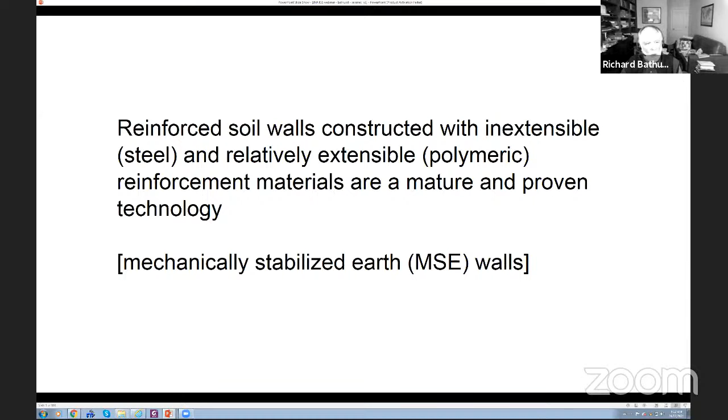The utility of these types of structures, that is to reinforce the soil, was increased with the advent of high performance polymeric materials such as geotextiles and geogrids.

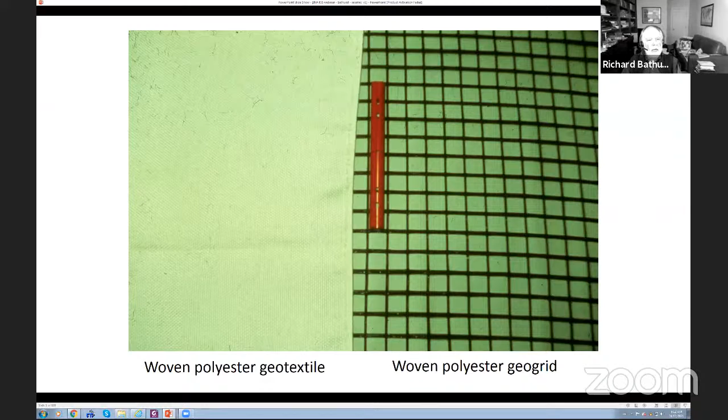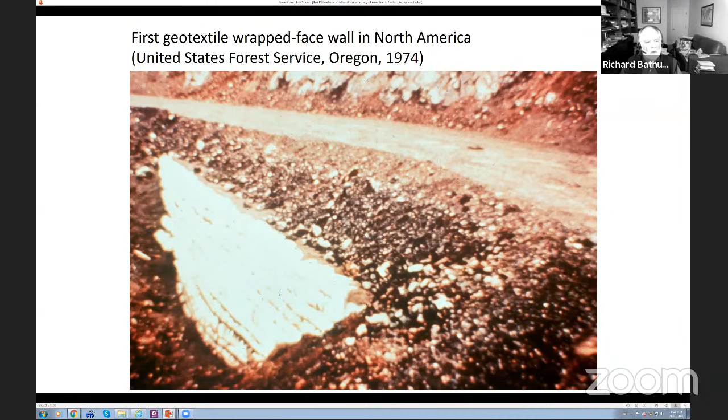Here is a slide of the very first geosynthetic reinforced wall constructed in North America. It's actually a wrapped face wall type. The slide is pretty grainy and arguably not a very attractive structure, but it is historical. This structure and many like it were constructed by placing horizontal layers of reinforcement in the ground and then wrapping them around and tucking them back in to generate a flexible wrapped face structure.

Some of these systems were very substantial. In 1989, a wrap face wall was used to support a prefill at a construction site in Washington State, United States. This wall was almost 13 meters in height at that time, and it was the largest wall in the world at that time. It was a temporary structure.

These types of wrap face walls are not as desirable as permanent structures because of the exposure of the wrap faces.

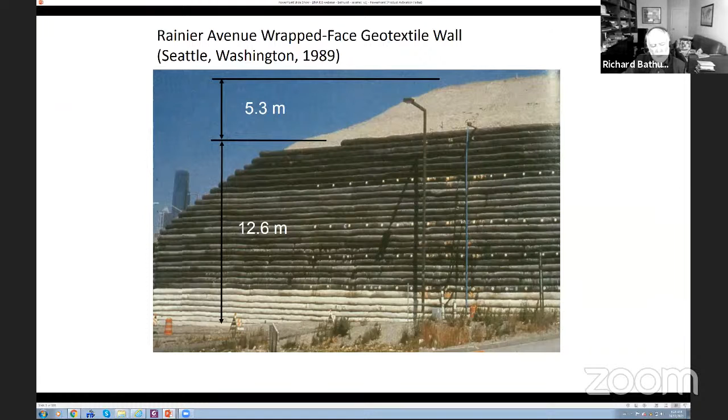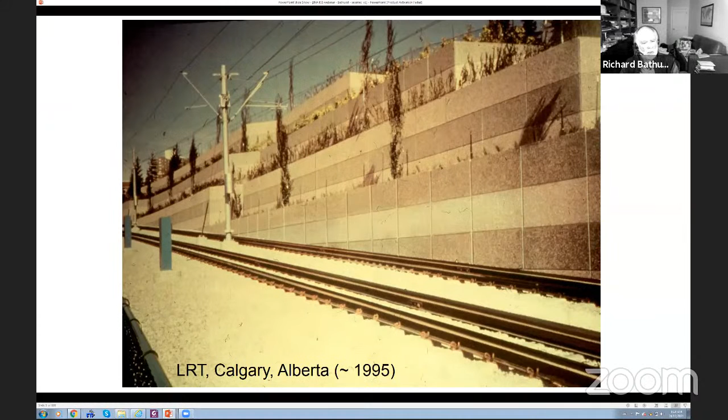Now we have seen hard-faced walls, and here, when you look at this structure, it appears to the layman to be a conventional gravity concrete wall in a tiered form. But the magic is that the facing units and the soil behind the facing is reinforced with horizontal layers, in this case of geogrids. These are attached to the panels, and the geogrid reinforcement is extended into the soil behind the facings.

This slide shows the construction of this type of system, and it happens to be the first propped panel wall constructed in Canada in the early 90s. Here you can see the geosynthetic reinforcement attached to the panels, extended and pre-tensioned into the backfill, and then the fill placed on top of it. This construction continues from bottom to top.

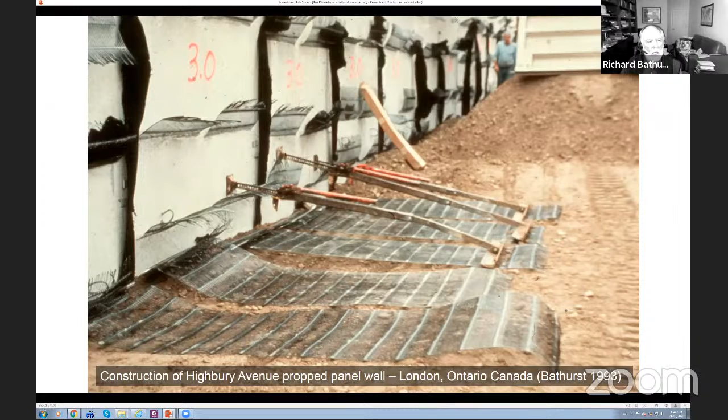Another type of system which is quite popular is the use of modular block facing units, which are most often dry cast mortarless concrete blocks. These are stacked, dry stacked to form a facing.

Then the facing is anchored with geosynthetic reinforcement, as you see here. What we have created, in effect, is a gravity wall, which is a composite of these concrete blocks, the reinforcement, and this reinforced zone of soil. Just like a conventional retaining wall, its purpose is to retain the soil located behind the structure.

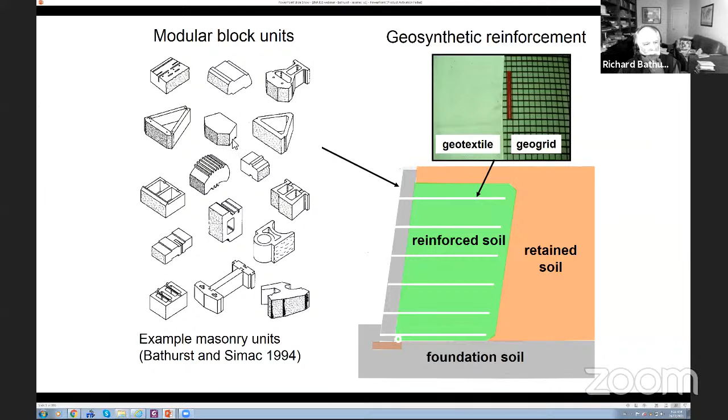There are many types of these modular block systems around. They have different shapes. Some of them are solid, some of them are hollow. They have different connection devices in order to ensure a good connection between the facing and the reinforcement.

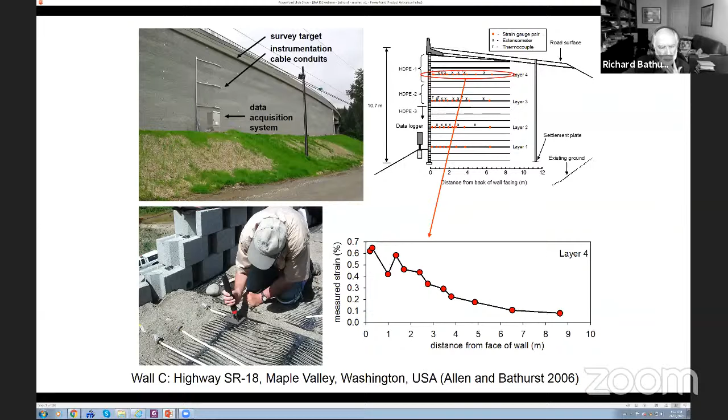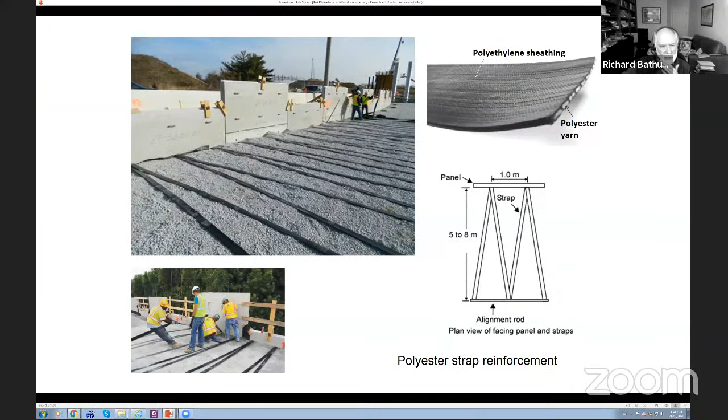So cost is very important, and it's fair to say that this technology has been driven by the manufacturers of these reinforcement products. And people like me have spent careers trying to understand how they work.

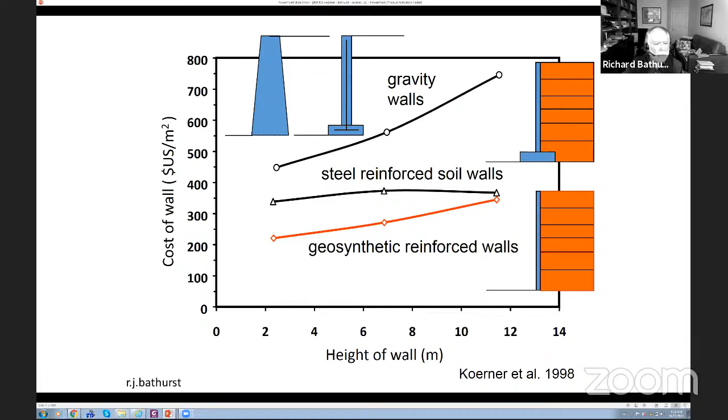Nowadays, sustainability is becoming much more important. What do we mean by sustainability? It's the combined benefit due to minimal environmental impact, cost, as we saw before, but also the functionality and aesthetics of the structure that you're constructing.

A few years ago, with my colleagues in Spain, we did a sustainability analysis of different types of structures: gravity structures, cantilever structures, and MSE walls constructed with steel and polymeric reinforcement. This type of audit ranks different systems using a scoring that includes environmental, economic, and societal function aspects. The higher the number, the more sustainable the structure.

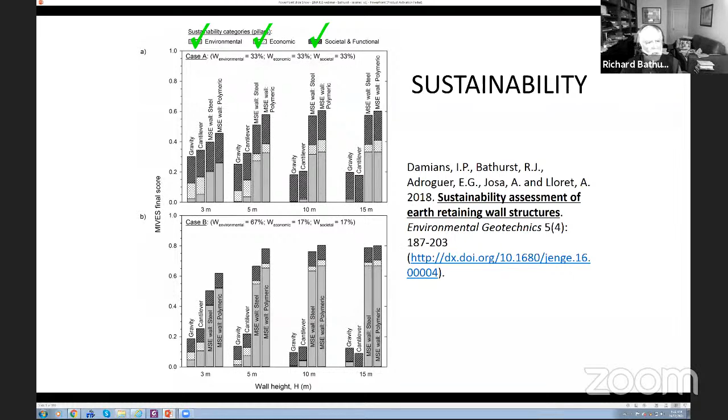But we're here to talk about seismic design and performance of geosynthetic reinforced soil walls during earthquakes. I'd like to start by saying that geosynthetic reinforced soil walls have demonstrated good performance during earthquakes, despite some slides I'm going to show where failures have occurred. But in general, they have performed well.

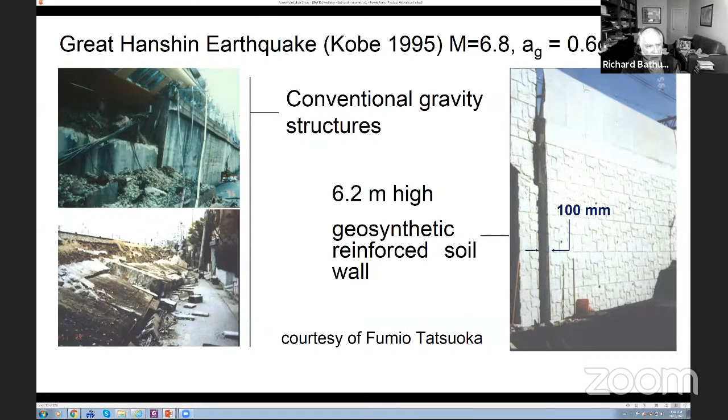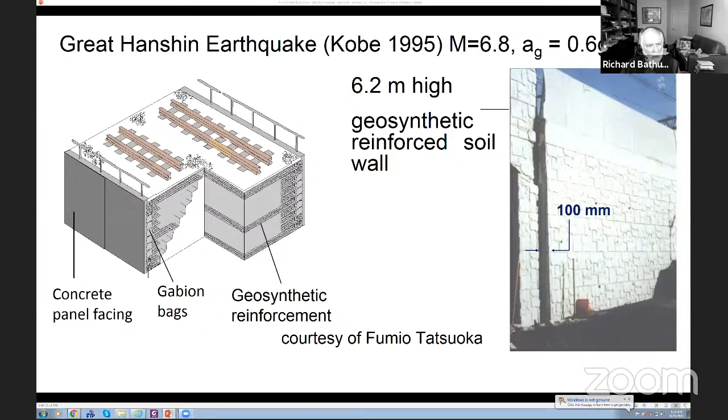Some of the performance features and characteristics of this earthquake were that in some places the accelerations were in excess of 0.6 G, and in a lot of places they were down around 0.2 to 0.5 G. There was very little damage to many of these structures, including panel and block-faced walls, even for those that were more than 12 meters in height.

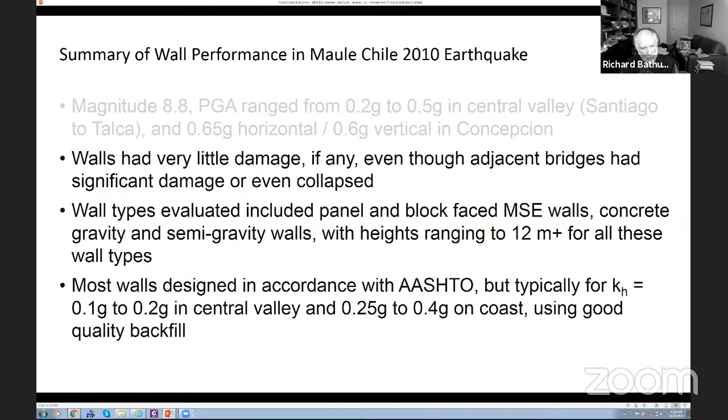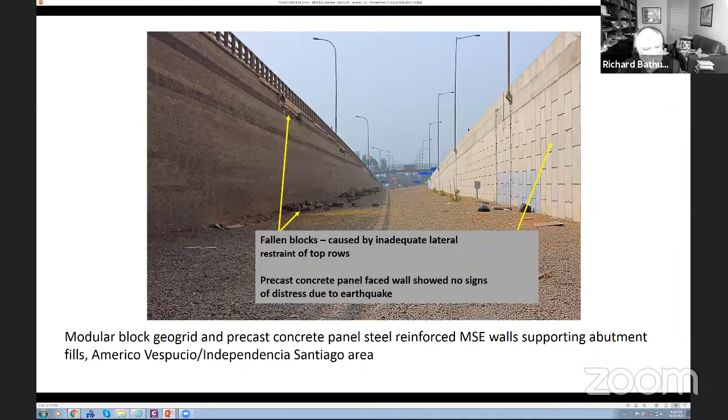Now, other techniques have been used for these types of structures, and I wanted to mention some innovations in Japan. Japan, of course, has a history of having to be subjected to large earthquakes. One technique they've developed to improve the seismic performance of the backfill used in the reinforced soil zone is to use cement-treated gravel, where they add about 6 or 7% cement to tie the material together.

An important question that arises when we are designing these MSE wall systems is: when do we need to carry out seismic analysis? Do we have to carry out seismic analysis for all peak ground acceleration cases? To answer that question, it's useful to look at some experimental shaking table tests carried out by others, including that shown here by Atik and Sitar at the University of California, Berkeley.

What you're looking at here is a schematic of a shaking table, the hatched line you see here. In a shaking table test, you put a model on this table, then shake it to simulate an earthquake event. In this case, they constructed two model cantilever wall systems. They look like excavations, but these are pairs of cantilever walls, placed in a volume of sandy soil.

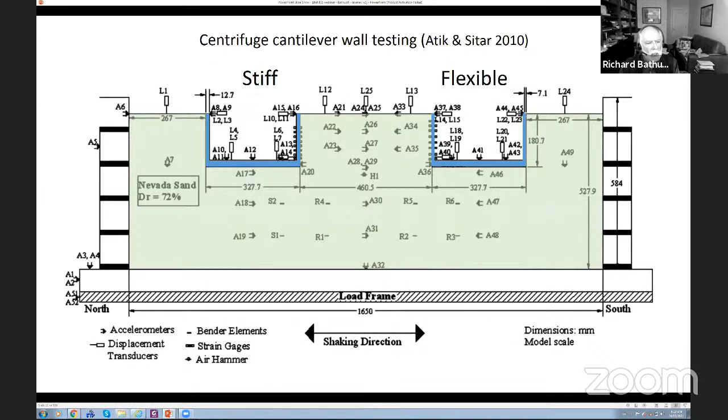The system on the left are cantilever walls that are quite stiff, and on the other side are cantilever walls constructed as models to be more flexible. They progressively shook this table back and forth, increasing the magnitude of the horizontal acceleration monotonically, uniformly. Here are some results.

On the left-hand side, we're looking at the stiff wall case. As the peak ground acceleration was increased progressively, they measured the magnitude of the additional dynamic force the wall was sustaining. Basically, there was no additional dynamic load measured on this stiff-faced wall until we got close to about 0.4 G, and then it increased more or less linearly with increasing horizontal acceleration.

So somewhere less than 0.4 G, the wall started to feel that additional dynamic load due to ground shaking. Its neighbor, with the flexible walls, this effect of the dynamic load occurred in excess of 0.4 G. So the dynamic load was not felt for the flexible wall until a larger peak ground acceleration occurred. There seems to be a difference in response based on how flexible or how stiff these retaining wall structures are.

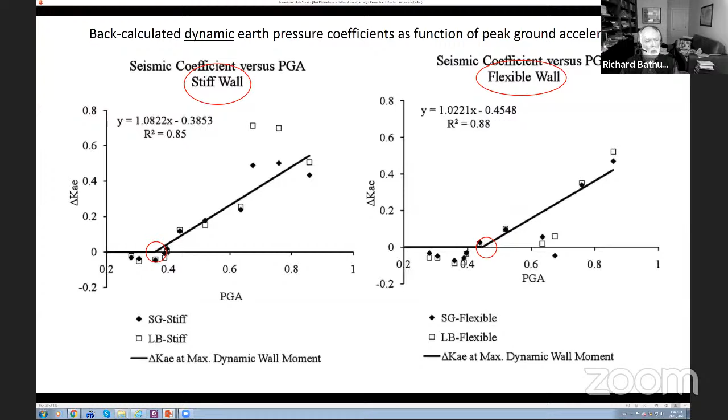This difference between stiff structures and flexible wall structures has been detected in other shaking table tests, including the ones shown here. A series of small scale tests were performed on a shaking table, and the difference between the tests was that some walls were gravity type or cantilever type, so relatively rigid, and another set of tests were done using geosynthetic reinforcement. Again, the peak ground acceleration was increased steadily over the course of the experiment, and the amount of deformation or wall displacement at the top of the wall was recorded, shown here on the vertical axis.

The gravity type and cantilever type walls had this type of response, with deformations increasing with horizontal acceleration. The reinforced soil walls had the same qualitative performance, but the curves were shifted to the right. Both show that the reinforced soil walls are more ductile, and the difference between these more flexible walls and conventional structures occurs somewhere around 0.5 G. This is not inconsistent with what we saw in those other shaking table tests done in California.

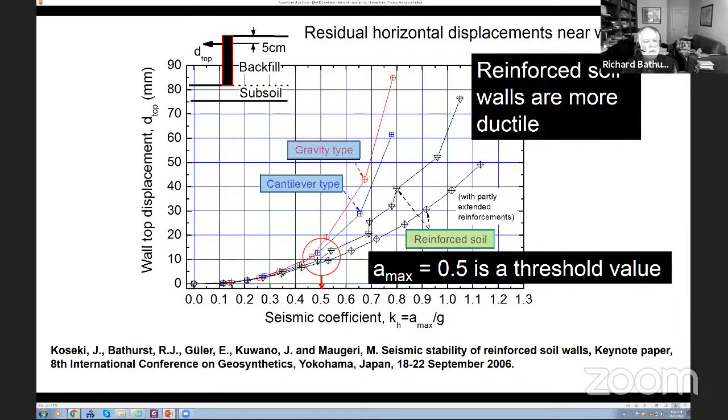How have actual walls performed? This is a wall that was constructed in California. It survived the Northridge earthquake in 1994. The peak ground accelerations at this site were estimated to be about 0.5 G. But when we looked at the face of this structure, there was no evidence of distress.

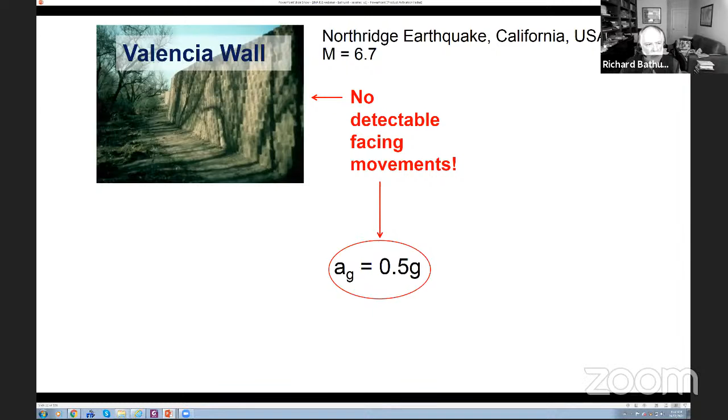However, when we went and looked behind the wall, there was a disturbing crack that had formed behind the retaining wall face. On closer inspection, and looking at the history of construction, what we found was that the contractor had originally designed the wall properly, extending the reinforcement layers to the full length, about 5.5 meters initially. But then he decided to place some subsurface utilities in this region, which required him to cut the reinforcement. This was not appropriate.

But the point is that despite attempts to modify this wall design, the wall still performed well. It was clear that there was additional conservatism in the design that allowed this wall to survive despite the worst intentions of the contractor.

In the United States, in the most recent AASHTO design guidelines, they recognized that there is inherent conservatism in the design of these reinforced soil systems when you design them for static. And this residual safety is enough for these walls to behave well if you then subject them to a peak horizontal ground acceleration less than about 0.4 G.

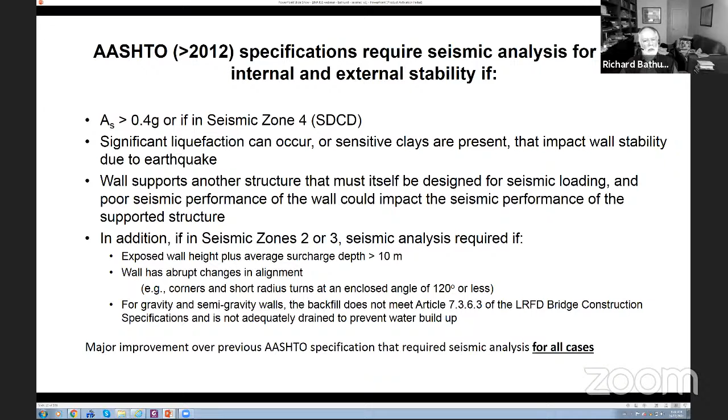When we design these walls, we start first by recognizing what are the limit states or modes of failure that these walls will have to survive. For those of you who have done this type of design work, you will recognize that we identify these limit states or modes of failure as falling into external stability categories, internal stability categories, and facing stability categories. And we design for these modes of failure for static.

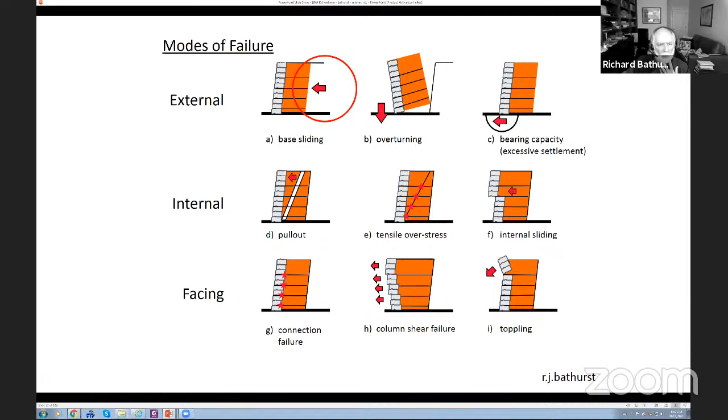What we have to do is consider the additional forces that are developed when seismic loads are imposed on these systems. So if we consider first external base sliding, the question is, what is the additional force that will be exerted on this composite mass as a result of horizontal ground accelerations or even vertical ground accelerations. The method that first comes to mind is the so-called Mononobe-Okabe theory approach.

The Mononobe-Okabe approach is simply the conventional or classical Coulomb earth force or earth pressure approach, in which additional horizontal inertial forces and potentially vertical forces due to seismic acceleration are included in the stability calculations for this critical wedge. And if one goes through the mathematics, you can relate the total active earth force - due to static plus seismic - in a classical active earth pressure formulation in which KAE replaces the active earth pressure coefficient that we recognize from classical active earth pressure theory.

So this is sort of the first level of analysis that we might carry out for these type of systems. And of course, the magnitude of this force is a function of the geometry of the wall and the back slope, and the friction angle, and the orientation of the face of the wall.

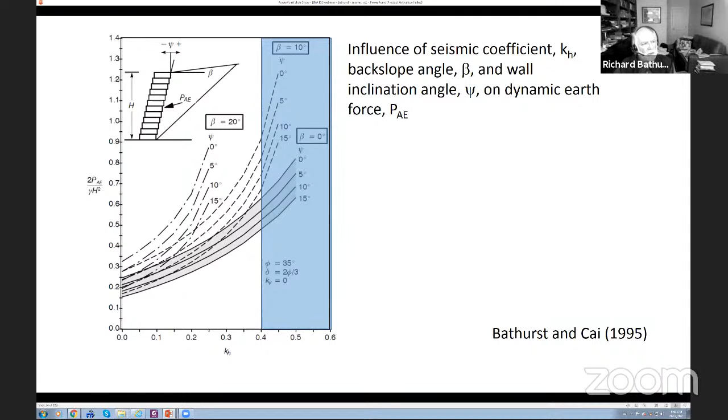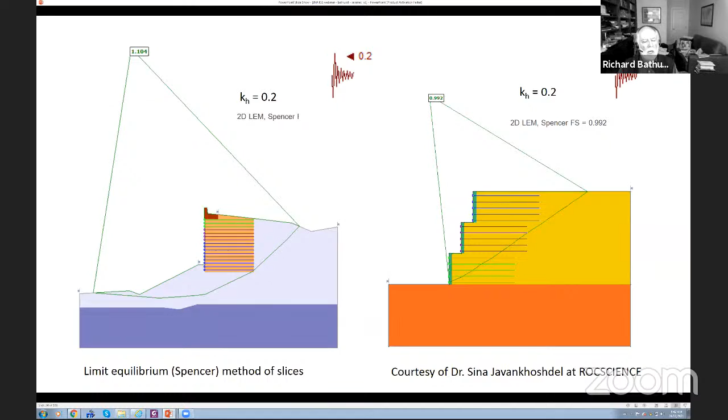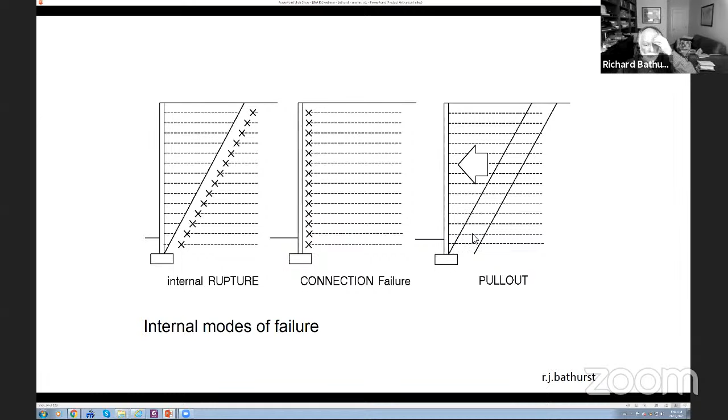We design to ensure this active earth force is less than the allowable tensile capacity of the reinforcement, so it doesn't rupture or strain excessively. This load also has to be less than the pullout capacity of the reinforcement in the pullout length within the resistance zone, and finally less than the load that can be carried by the connection. That's the classical simplified tieback wedge approach.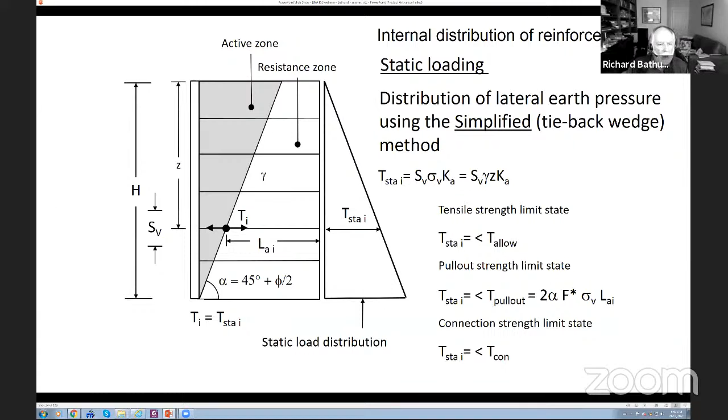Now, what has happened recently in the United States is that the distribution of load or pressure carried by each reinforcement layer is calculated using the stiffness method. As the name implies, this relates the load in the reinforcement to its stiffness, not its strength. This method shows that the distribution of load doesn't increase linearly with depth as in the previous slide; it's more bilinear.

The calculations are otherwise similar, although this method introduces empirical coefficients that account for the stiffness, as mentioned, as well as the flexibility of the facing and similar factors. Again, in design you ensure the maximum calculated load is less than the allowable strength of the reinforcement, pullout capacity, and connection performance, as before. This method provides more reasonable estimates of reinforcement load—the simplified method used in the US before last year was excessively conservative.

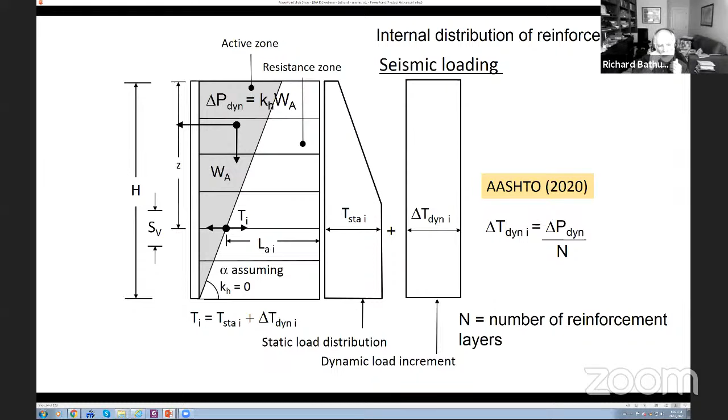That's the premise of this method for calculating the internal distribution of reinforcement loads in MSE walls or geosynthetic reinforced walls under seismic loading. How do these methods work? I just showed you one treatment of the additional horizontal load due to horizontal shaking. We've done shaking table tests and looked at different methods people use to calculate this additional dynamic load. Basically, we found this superposition technique does a reasonably good job, at least in our shaking table tests, matching the measured tensile loads in these reinforcement layers under simulated earthquake.

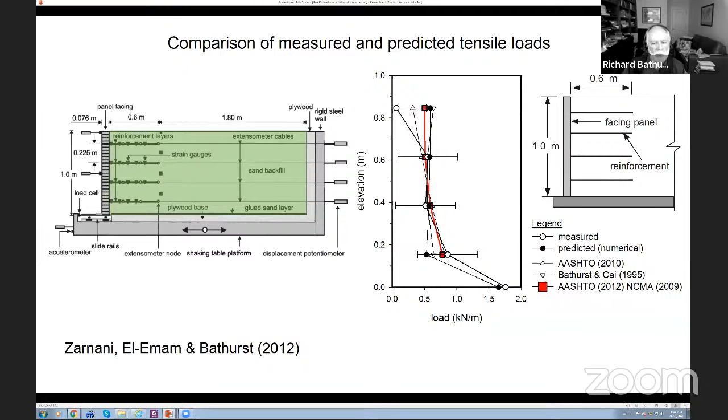Here's a slide showing some shaking table tests that we have performed in the past. Here you can see a modular block wall, and here's a picture of our shaking table at RMC at that time. And I'm going to show you a movie.

This was a fairly intense simulated earthquake. There's a lot of audio with this particular slide, which I don't want to share with you.

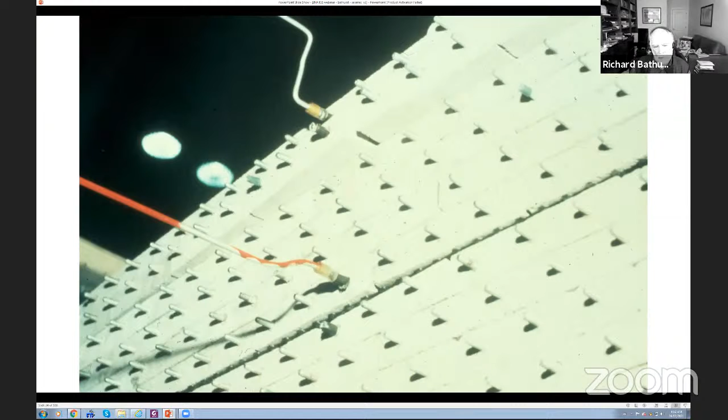So here you see, looking up the face of that same test after the test was over, and you can see some of the blocks have shifted. This speaks to the need to ensure, particularly at the top of these walls, that you have sufficient connection capacity. This is easily done either by constructing walls that have very good mechanical connections, or other techniques that people have used to tie the top of these walls together.

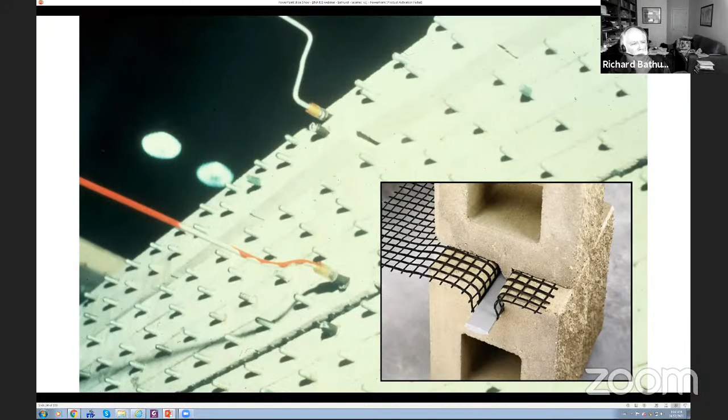I had the opportunity to do a reconnaissance of retaining wall performance after the El Salvador earthquake in 2001, and this was quite a significant earthquake. It did a lot of damage, and there were many conventional gravity wall structures like the one you see here that failed absolutely completely. This was a full-scale laboratory for me to go down and see how different types of retaining walls behaved during this event.

Here's a modular block wall that didn't fall down, but it had some cracks on this corner. Again, you may recall in AASHTO they say pay special attention to these outside corners.

But on the other hand, there were other walls. In fact, this one was just across the road, and this one had actually been better designed, and it behaved perfectly. It was because it had been designed for seismic loading, using seismic design recommendations that I was involved in at that time for the design and construction of modular block walls.

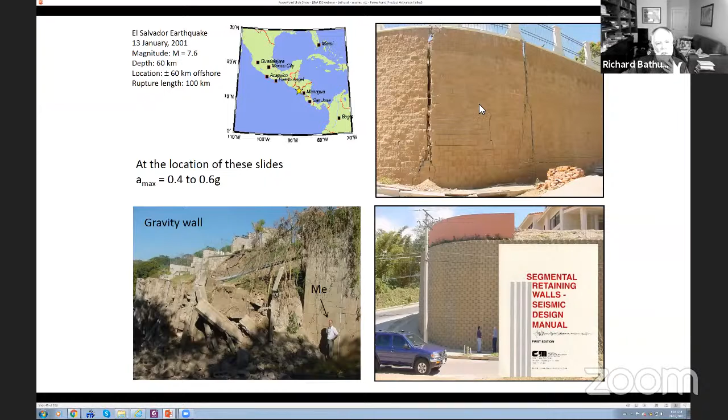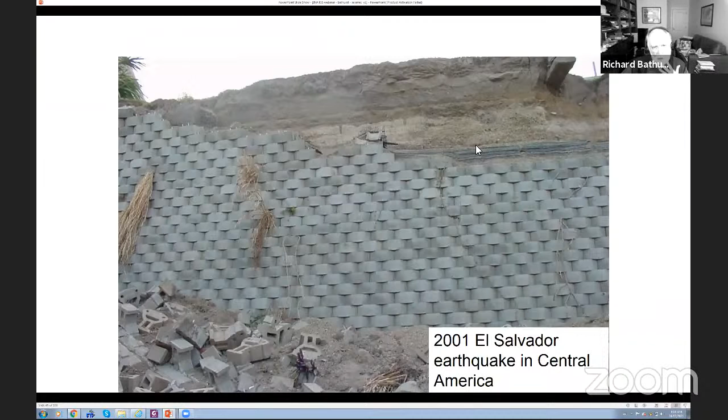The owner of this wall at that time was so enamored and so happy with it, he told the contractor to make it even higher, but to save some money and not buy that plastic stuff. So they built the wall higher, and the earthquake happened, and the unreinforced part of that wall fell out, as you see here. Lesson learned.

The next level of sophistication for design and analysis of reinforced soil walls is to use dynamic finite element modeling, or FLAC modeling, and we've done a lot of this. The problem is that it's user beware. You don't want to do this type of analysis unless you have some experience, because these types of sophisticated models will always give you an answer, but whether it's a reasonable answer or not is a decision that has to be made, preferably by people that have this type of experience.

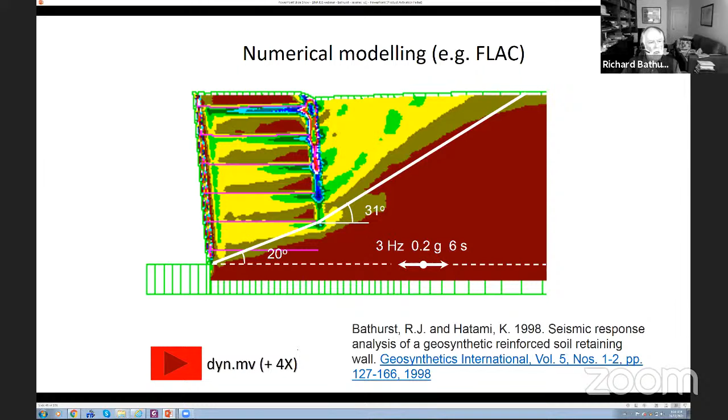One performance feature of these types of structures, which is often not mentioned, is the influence of the wall's fundamental frequency. This is the natural resonance that all structures have, and it can actually be explored most easily using numerical models, such as the FLAC model that I showed you in the previous slide. Here are some interesting outcomes.

Here we see a reinforced soil wall, and this numerical wall was subjected to different frequencies of loading. It had the same peak ground acceleration, but we went through a suite of different frequency content. We measured, or calculated, the deformation of the wall, maximum deformation, and here it's just normalized with height of wall.

And so what we found was that there was a critical frequency where this wall came apart numerically. This occurs about the natural frequency of these structures.

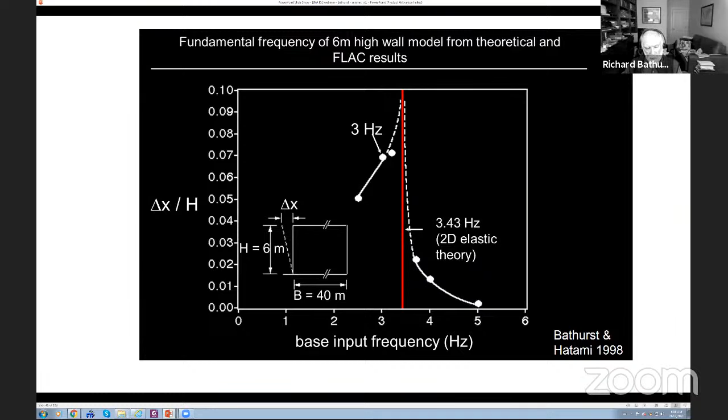In North America, typical wall height is about 6 meters. In some places, the typical input frequency or predominant frequency of earthquakes is in the vicinity of about 3 hertz. So what this means is that if you had a long duration earthquake with a predominant frequency in the range of 3 to 4 hertz, the wall may misbehave. And this is something you can't catch using conventional force-based design methods, such as those I've shown you before. So this is something that has to be looked at.

Another question that is often asked: what is the influence of reinforcement stiffness? Geosynthetic materials have stiffnesses that typically range from about 500 kilonewtons per meter to 2,000. And steel reinforcement materials can be up around 70,000 kilonewtons per meter. So I'm talking about steel reinforcement.

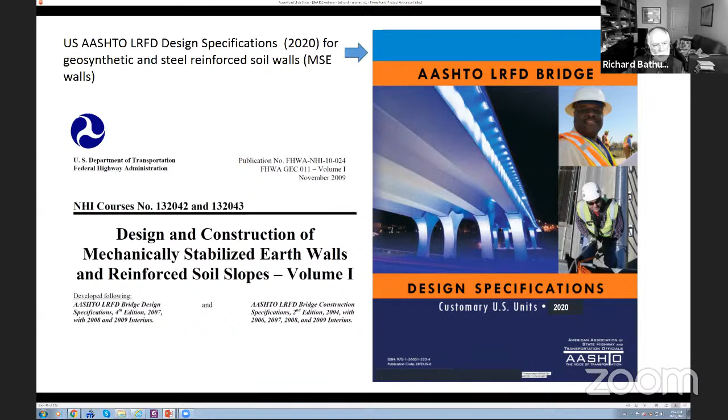Indonesia, of course, has tragically suffered from the effects of tsunami. I'd like to say a few words about geosynthetic reinforced structures and their performance due to tsunami. I'll start with this slide here.

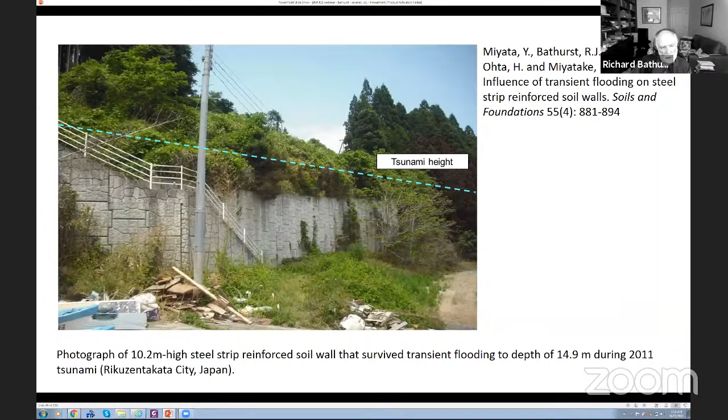This problem of cyclic water loading on MSE walls is of interest to Japanese practitioners. Myself and my dear friend and colleague, Dr. Yoshi Miyata, have been able to analyze the behavior of full-scale MSE wall structures constructed at the Public Works Research Institute in Japan. These folks are amazing - they build these structures, and you can see the size of them.

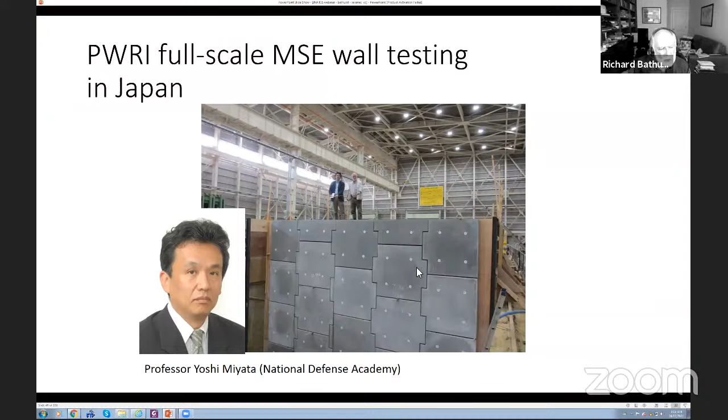That's me, okay, and I'm pretty large, but you can see the walls are much bigger. The walls are subjected to different types of loadings. Again, this is just one example.

While this was going on, the behavior of the fill and the loads in the reinforcement layers were recorded. A practical outcome from this study and other walls of this type was that, as long as the soil behind the panels is well draining, and as long as you place a suitable porous geotextile behind the back of the wall to keep the soil from running out between the joints, these walls will perform adequately. This was a takeaway from this type of full-scale testing.

And there are more tests of this type that are underway in Japan as I speak.

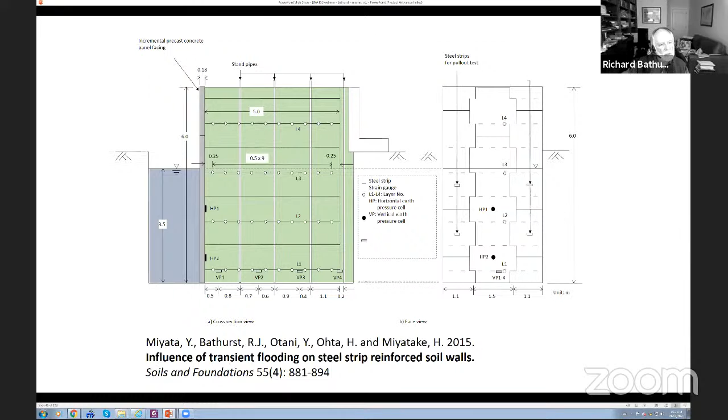Another application of geosynthetics in Japan has been the construction of coastal countermeasure protections. One of the problems with these tsunamis is that they can travel great distances inland, we're talking kilometers. So one way to mitigate against that inland inundation is to build these berms.

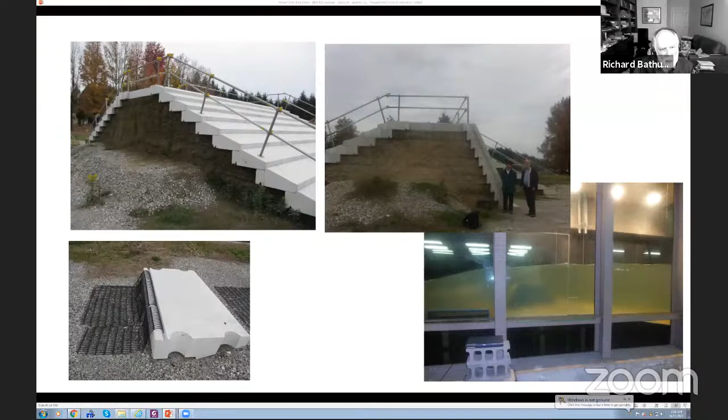Just a second. Okay, so here you see this shows the same general approach, but it's an embankment supporting railway tracks. You can see the upstream concrete face, which is impacted by the tsunami.

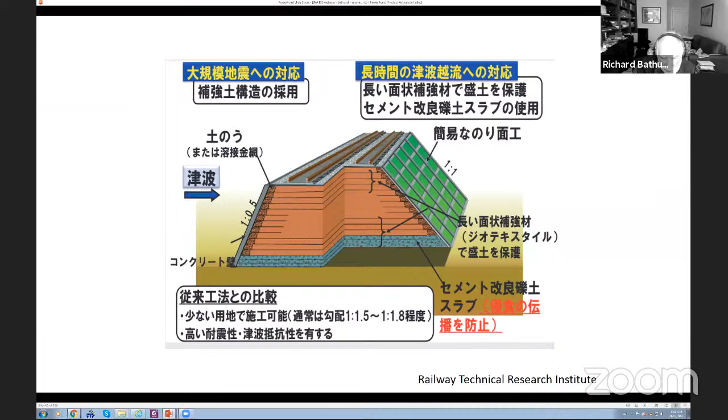These were originally developed to reduce the lateral earth pressure behind rigid walls by letting the wall composite, that is the buffer, deform and allow the soil behind the wall to reach an active state, because we all remember that the active state is the state which develops the minimum lateral pressure against a rigid retaining wall structure. So this buffer encourages an active state to be developed.

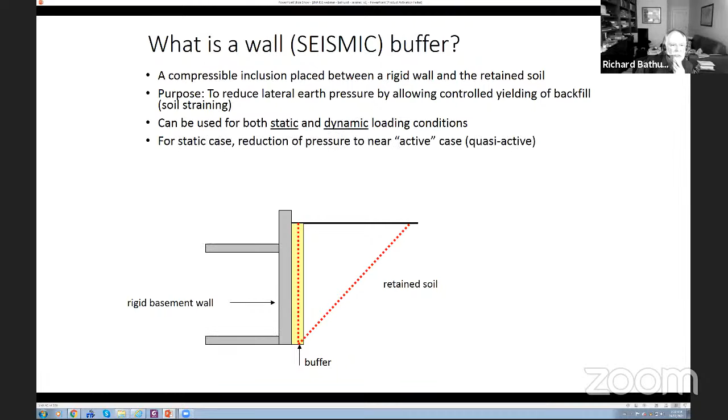Now this technique was originally proposed for static loading, but can be extended to dynamic loading. So it's not just getting to an active state under quasi-active conditions, but it can also conceptually act as a buffer to reduce dynamic loads.

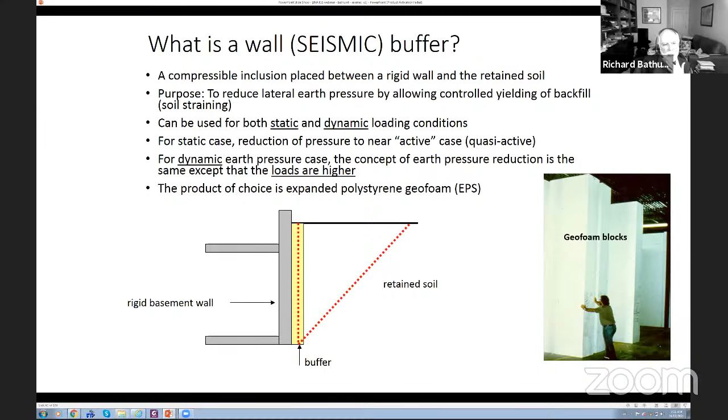And the material that is best suited for this purpose is polystyrene or geofoam. We call it expanded polystyrene geofoam, or EPS. Here you see a picture of this material after it's been manufactured. Many of you may be aware of this material because it's the same material that's been used as a lightweight fill for many decades.

The first example of an EPS seismic buffer actually occurred in Canada, and it was used in conjunction with deep basement walls at the location of a very tall building in Vancouver. The problem that the structural engineers were faced with is that during an earthquake, additional horizontal loads are developed against rigid reinforced concrete wall structures, and to carry those additional loads requires more concrete and more reinforcement. So the idea was, how can we reduce those dynamic loads?

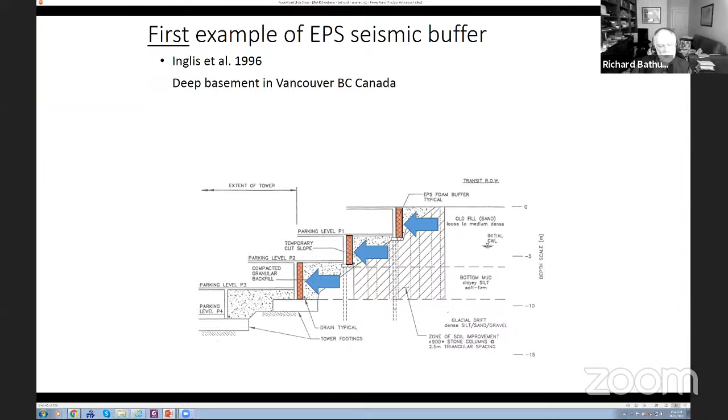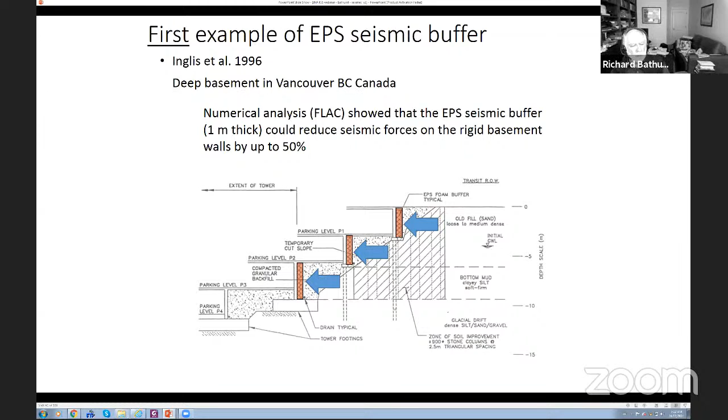And they were able to show, the geotechnical engineers were able to show, at least theoretically using a FLAC model, that you could reduce the seismic loads by up to 50% by putting in this compressible seismic buffer. So numerically, there was evidence in support of this technology, but what was required was proof of concept.

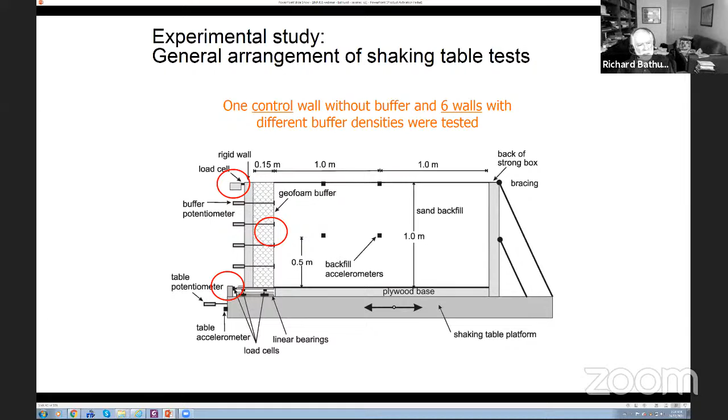While we're doing that, we can measure how much the foam compresses, and we can measure the horizontal loads acting on the rigid wall to see whether the buffer is reducing those loads or not. We did one test with a control wall, meaning no foam, and then six other tests where we played around with the density of the geofoam buffer material.

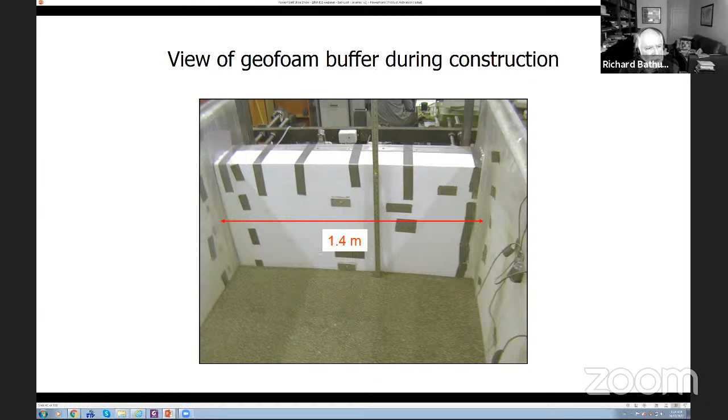That area was filled with sand. We had six buffer tests and one control test, and we played around with the density of the foam, either by purchasing foams of different densities, or by simply cutting out portions of the foam inside the buffers to reduce its macro density even further. This changed its modulus, but we kept the thickness the same.

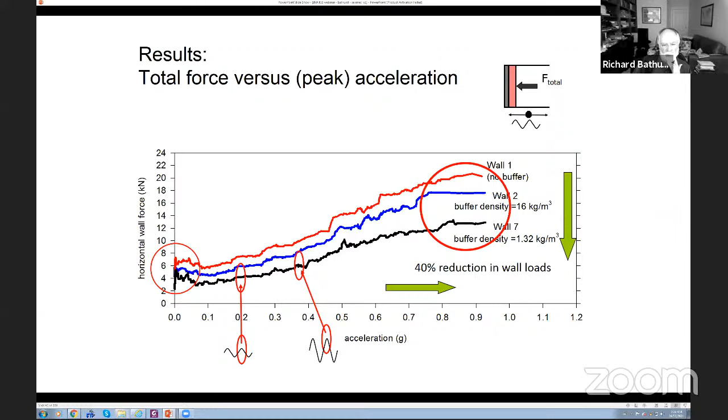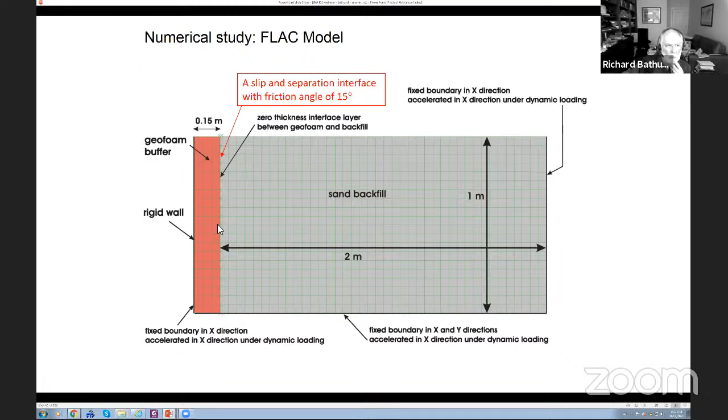So what we did next is we used a FLAC model to carry out parametric analyses to come up with design charts that could be used for actual field cases. We compared the predicted forces using our numerical model to experimental models.

As the experiment progressed and increasing ground acceleration was applied, wall forces that we measured went up, and perhaps miraculously, our numerical model was able to pick up and give a reasonable prediction of what we actually measured. That meant we could take this model and scale it up to field scale and carry out a parametric study.

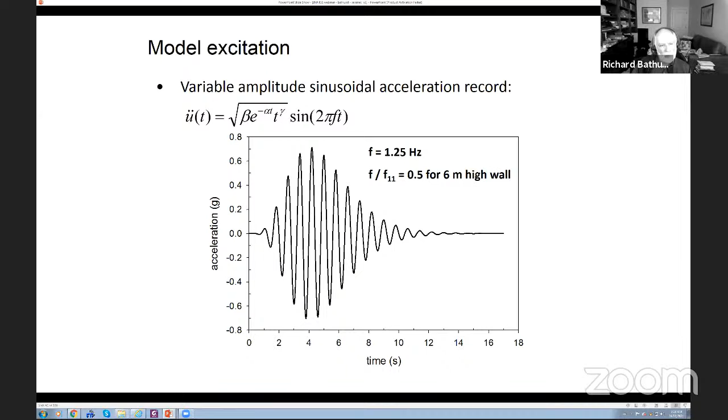We came up with a synthetic excitation record, which is this variable amplitude you see here. We were able to change the frequency of the excitation and its magnitude, and from this, we were able to quantify performance parameters for these buffers.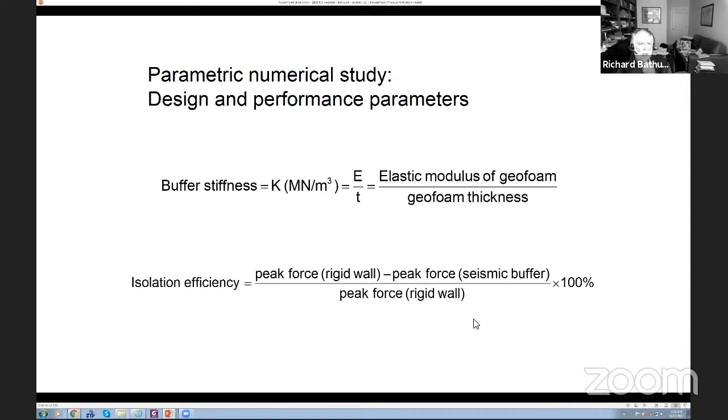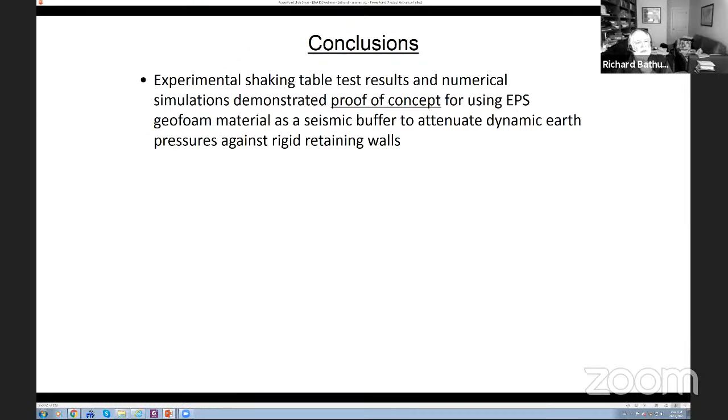At the end of the day, we came up with design charts that show the efficiency of the seismic buffer versus its stiffness, or buffer stiffness. We did this for walls of different height and different combinations of predominant frequency versus the natural frequency of the walls. Basically, what we found is as the buffer stiffness goes down, the efficiency goes up. From these charts, and from this work in general, we were able to demonstrate physical proof of concept, and we identified the seismic buffer stiffness as a main parameter.

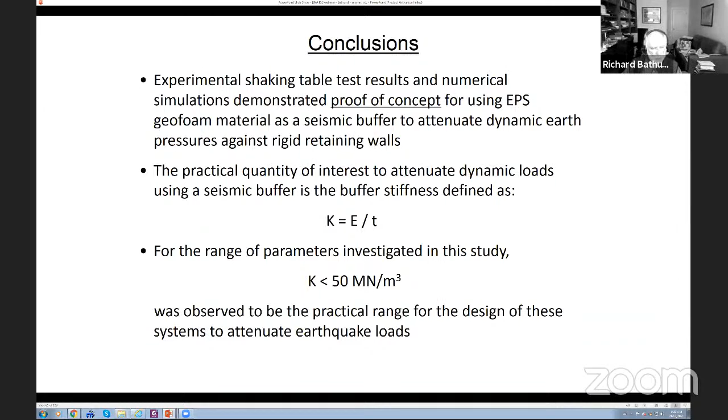What we were able to recommend to designers is that if they can keep this buffer stiffness value to less than about 50 meganewtons per cubic meter, which is not hard to do because you just have to adjust the thickness of the buffer and its stiffness to get in this range, you will generate significant reductions in dynamic load due to earthquake. There are a number of papers written on this that you can find.

I'm happy to say that this technique was actually used at the location of a reservoir in Vancouver. This was a storage reservoir, ultimately capped with a roof. The reservoir walls were rigid reinforced concrete type, and it was girdled by this EPS seismic geofoam material in order to reduce potential dynamic loads due to earthquake. So it's actually been used in practice.

And again, if you're interested in this technology and some of the other slides I may have shown you, there's a bunch of papers you can just download from my website. So I think I'm slightly over the time allocated to me, but I've run out of slides, so I will stop here and entertain questions.

Well, Richard, can you hear me? I want to make sure. Yep, okay.

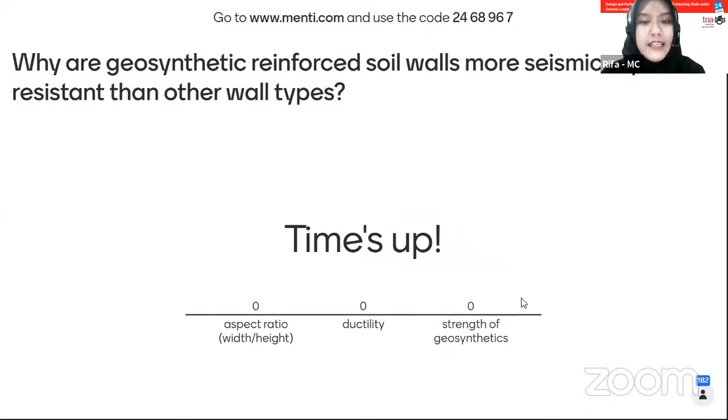We have 20 seconds left. Come on. Time's up. Let's see what is the answer. It's ductility. We have 61 people who are right, but who is leading the leaderboard for this first question?

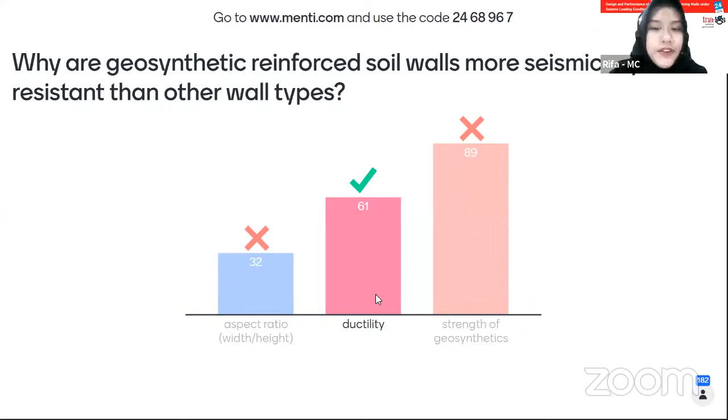For the first question, the leader is Aflizal Arafianto. Well, can you keep up until the end of the game?

Let's see. Here comes the second question. Question 2 of 4. Answer fast to get more points. When do we need to carry out seismic design?

Is it after an earthquake has caused damage near our site? Is it for all projects in Indonesia? Or when codes indicate high seismic risk? So what is the question? You have 45 seconds to answer the question. But answer faster and you get more points.

30 seconds left. When do we need to carry out seismic design? Is it after an earthquake has caused damage near our site? Is it for all projects in Indonesia? Or when codes indicate high seismic risk?

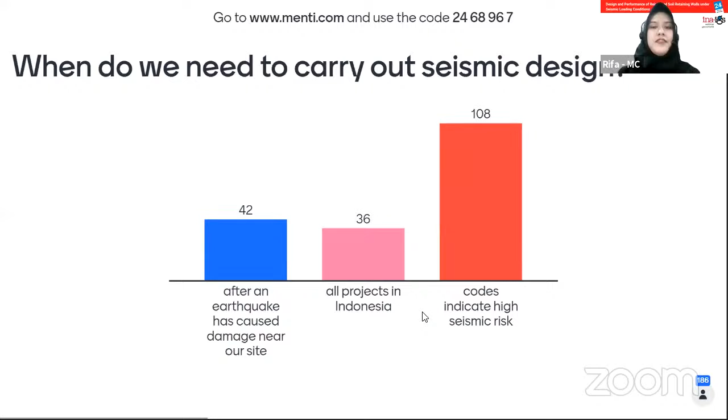10 seconds left. 5, 4, 3, 2, 1. Time's up. So the answer is when the codes indicate high seismic risk.

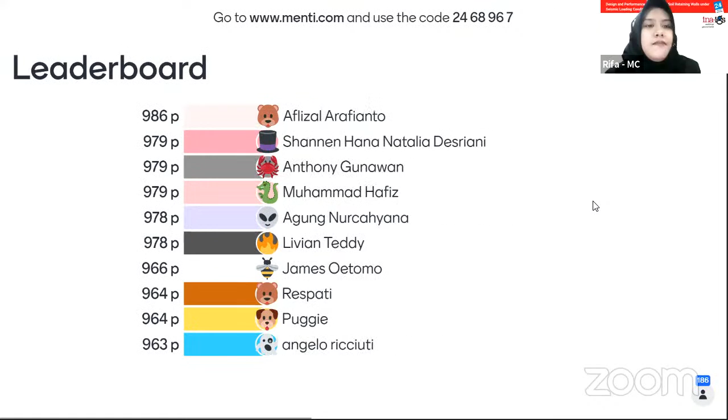Let's go to the third question. We have 4 questions, okay? Start. Answer fast to get more points. Which method of analysis is adequate for preliminary seismic design and feasibility of geosynthetic reinforced soil walls? Is it wall design method with pseudostatic seismic forces, or 2D FEA with earthquake time history, or 3D FEA with nonlinear soil models and pseudostatic forces? You have 40 seconds left to answer the questions.

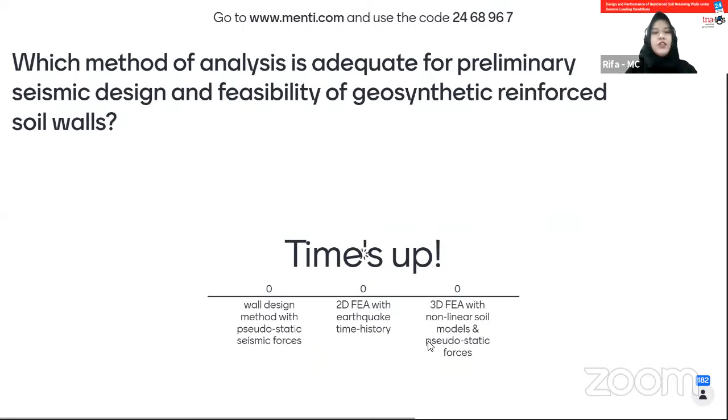25 seconds left. 15 seconds left. Okay, 5, 4, 3, 2, 1. Time's up. So what is the correct answer? The answer is wall design method with pseudostatic seismic forces.

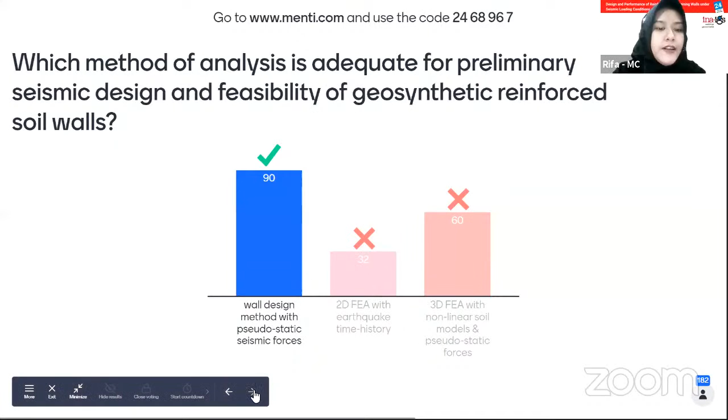Let's see who leads the leaderboard. We have a tight competition here. The fastest is Widjojo Prakoso, but not the leader of the leaderboard.

The last question. Answer fast and answer right. Question 4 of 4. Get ready. Last question. What is geofoam? This might be the most difficult question.

Is it a beer served in Atlanta? Is it a method of harvesting wave energy? Or is it a lightweight fill? What is geofoam? I think it might be the first one, or I don't know. It might be a hint.

Is it beer served in Atlanta? Is it a method of harvesting wave energy, or is it lightweight fill? You have 20 seconds to answer this difficult question.

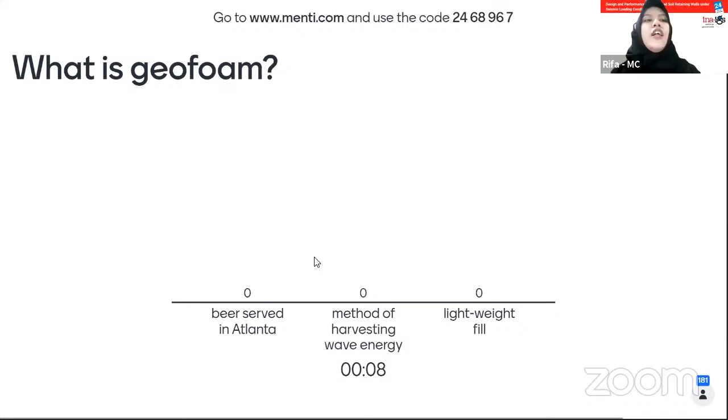Ten seconds left. Let's see who wins the game. 4, 3, 2, 1. Time's up.

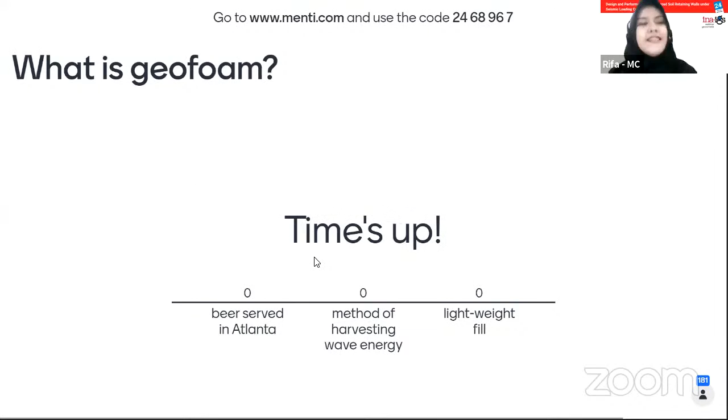The answer, what is geofoam, it's lightweight fill. It's not beer served in Atlanta. Sorry for the 5 people who answered that.

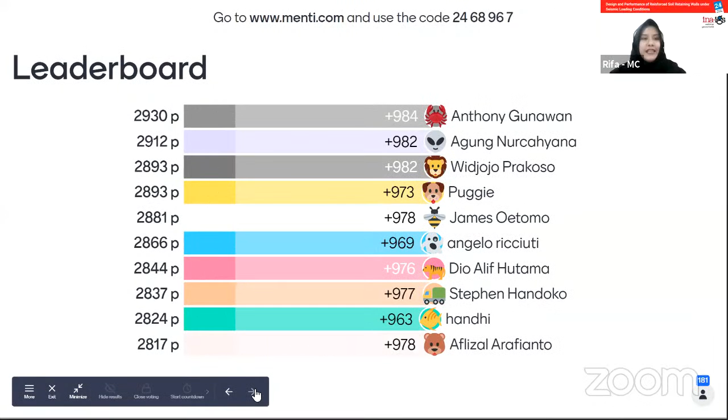Okay, who is the winner of the game? Let's see. Well, congratulations to Anthony Gunawan. The committee will contact you after this webinar, and congratulations for winning the game with a point of 2,930. Once again, congratulations and thank you to everyone who participated in the game.

Okay, maybe Richard, do you want to say a word or two about the game? Oh, that was, I've never seen that before. That was very exciting. But it also means that there are some people that should not be allowed to design MSE walls. Yeah, 5 people answered that geofoam is a beer served in Atlanta.

Thank you, Richard, for making the questions for the game. Thank you. Okay, coming up for the quiz.